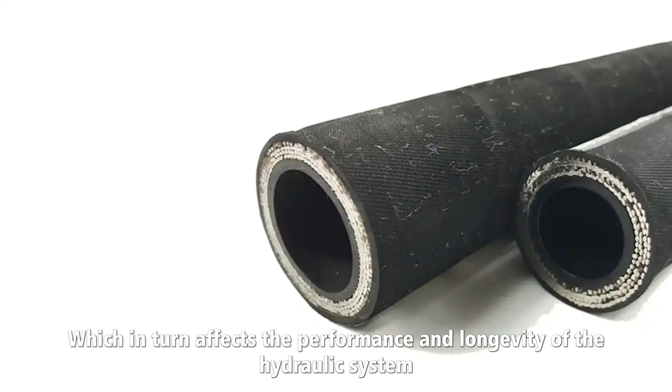The right blade choice directly impacts the quality of the cut, which in turn affects the performance and longevity of the hydraulic system. By selecting the appropriate blade for each type of hose, operators can significantly improve their cutting process, reducing downtime and enhancing the overall safety of the work environment. This post will guide you through the key factors to consider when choosing the right blade, ensuring optimal performance for your hydraulic hose cutting needs.

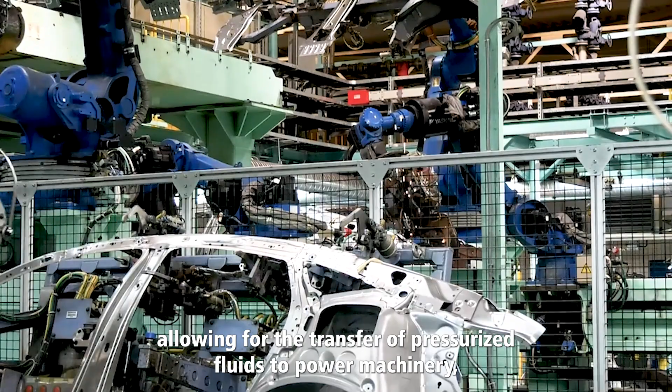Understanding hydraulic hoses. Types of hydraulic hoses. Hydraulic hoses are essential components in hydraulic systems, allowing for the transfer of pressurized fluids to power machinery, industrial equipment, and vehicles. These hoses are constructed from different materials, each tailored to specific applications and environmental conditions.

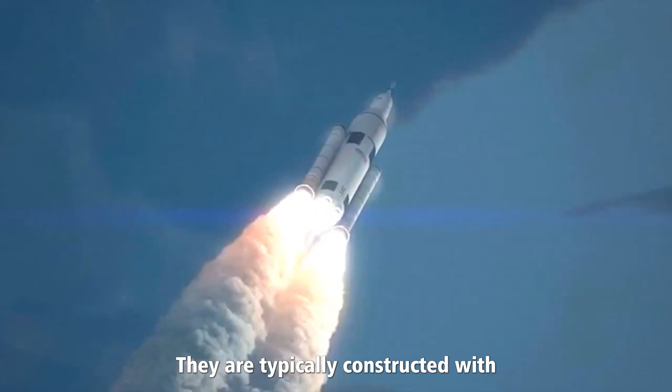Rubber hydraulic hoses. Rubber hoses are among the most common and versatile types used in hydraulic systems. They are typically constructed with an inner rubber core, reinforcement layers, usually made of braided steel wire, and an outer rubber cover. Rubber hoses offer flexibility, high pressure resistance, and good performance in various temperature ranges. They are often used in applications requiring high levels of vibration absorption and movement.

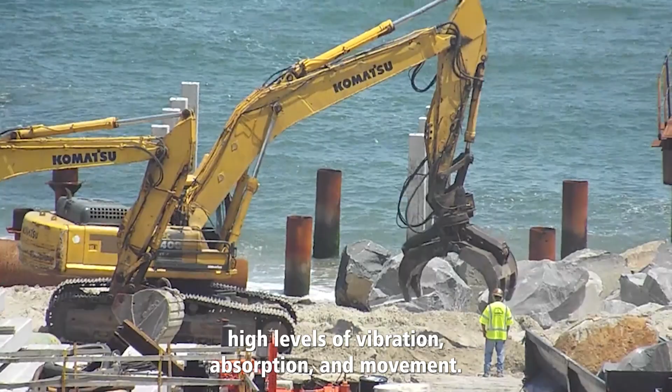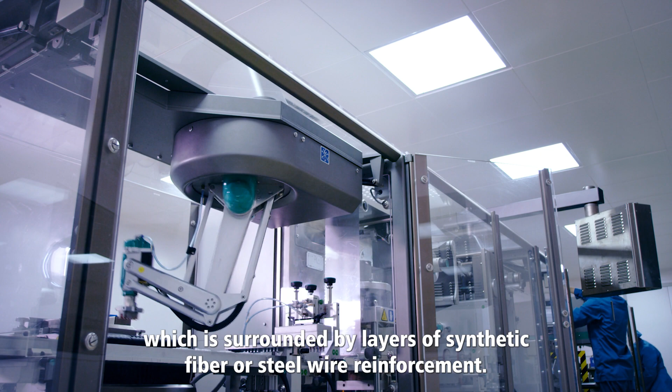Thermoplastic hydraulic hoses. Thermoplastic hoses consist of a polymer-based core, which is surrounded by layers of synthetic fiber or steel wire reinforcement. Thermoplastic hoses are lighter and more resistant to abrasion compared to rubber hoses. They also offer excellent chemical resistance, making them ideal for applications involving corrosive substances or in environments where weight is a concern, such as mobile equipment.

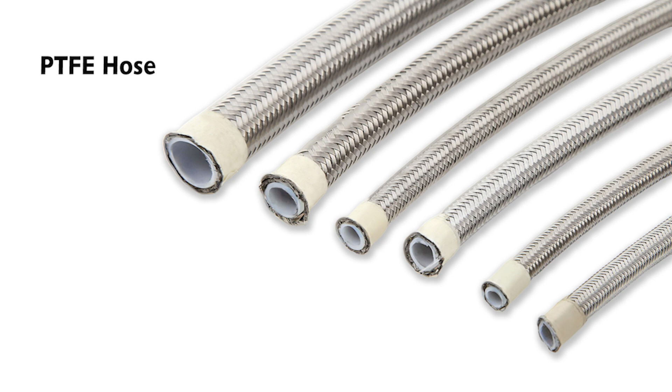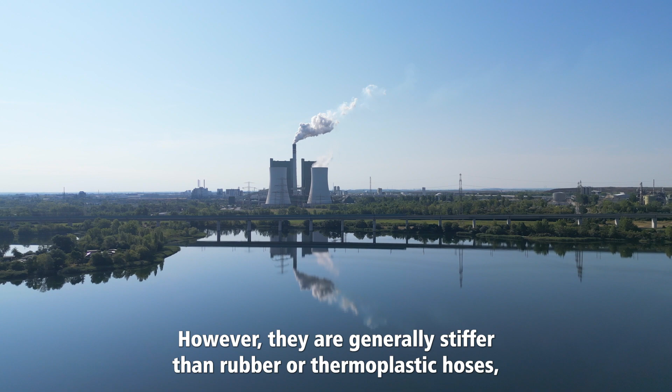Teflon (PTFE) hydraulic hoses. Teflon hoses, made from polytetrafluoroethylene (PTFE), are highly resistant to heat, chemicals, and wear. PTFE hoses are commonly used in high-temperature applications or where extreme chemical exposure is expected. Their smooth interior reduces friction and helps maintain fluid flow efficiency. However, they are generally stiffer than rubber or thermoplastic hoses, which can make cutting and handling more challenging.

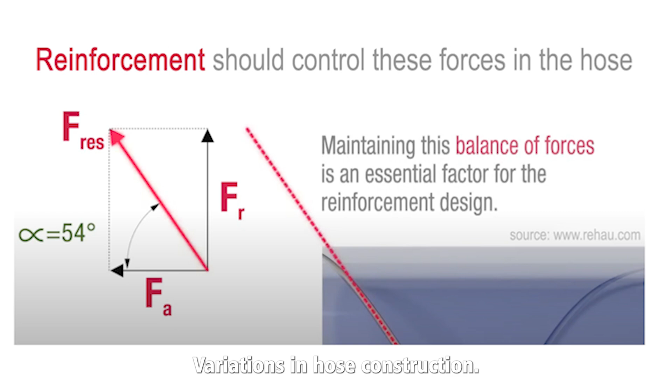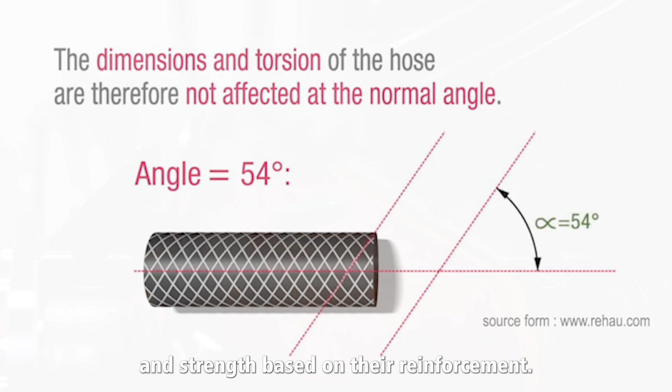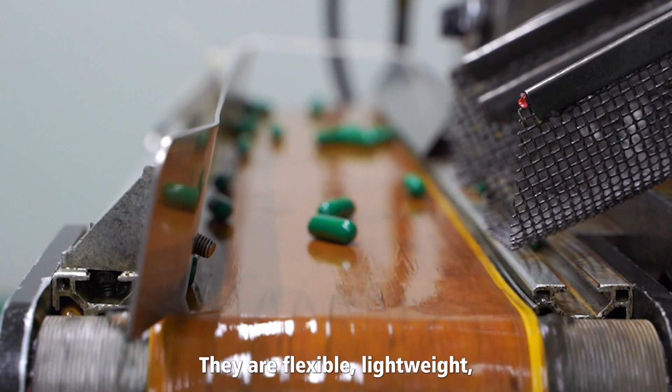Hydraulic hose reinforcement types. Variations in hose construction. Hydraulic hoses are built to withstand the pressures and conditions of their specific applications. The construction of these hoses varies in complexity and strength based on their reinforcement. Single-wire braided hoses. These hoses feature a single layer of braided steel wire reinforcement between the inner tube and outer cover. They are flexible, lightweight, and used in lower pressure applications.

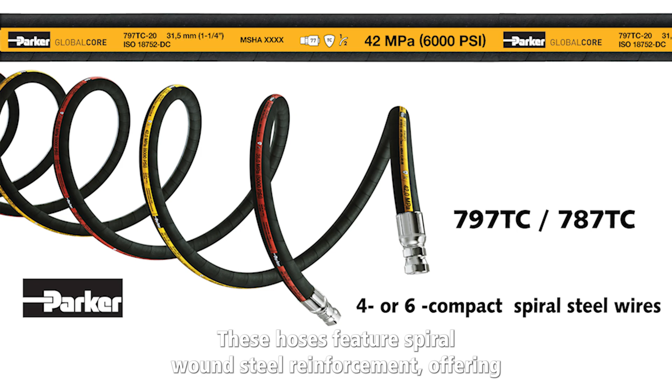Multi-wire braided hoses. Constructed with multiple layers of steel wire reinforcement, these hoses provide increased strength and durability. They are suitable for high-pressure applications and are common in mobile and industrial machinery. Spiral-wound hoses. These hoses feature spiral-wound steel reinforcement, offering superior strength and resistance to high pressure. Spiral-wound hoses are less flexible than braided hoses but are capable of withstanding the highest pressures and are commonly used in heavy-duty industrial settings.

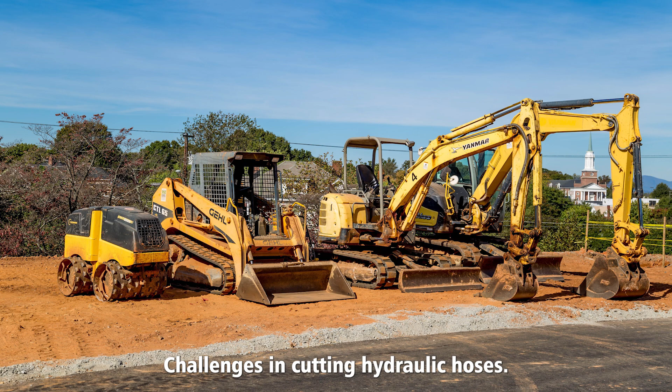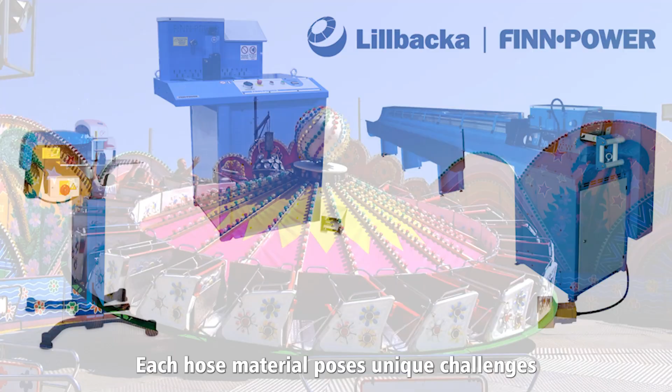Challenges in cutting hydraulic hoses. Cutting hydraulic hoses is not a straightforward task due to the complexity of the hose materials and the variety of their reinforcement structures. Each hose material poses unique challenges that require specific tools and techniques for efficient and safe cutting.

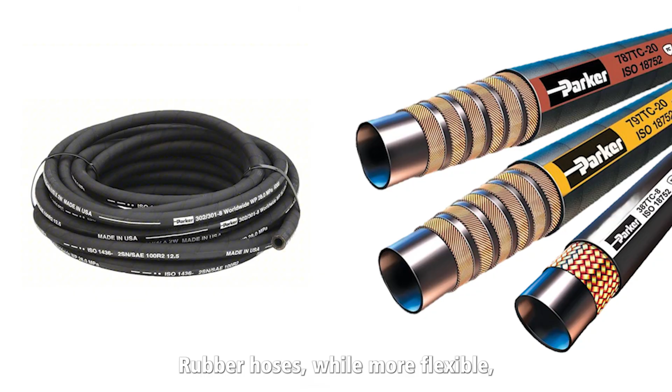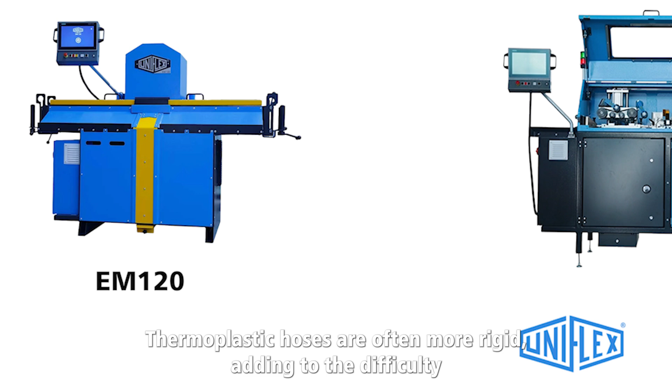Impact of hose material and thickness on cutting difficulty. The thickness and toughness of hydraulic hoses, particularly those reinforced with multiple layers of steel wire or spiral-wound reinforcement, make cutting them difficult. Rubber hoses, while more flexible, can still present challenges because of their thickness and the potential for deformation during cutting. Thermoplastic and PTFE hoses are often more rigid, adding to the difficulty of making clean cuts without specialized blades.

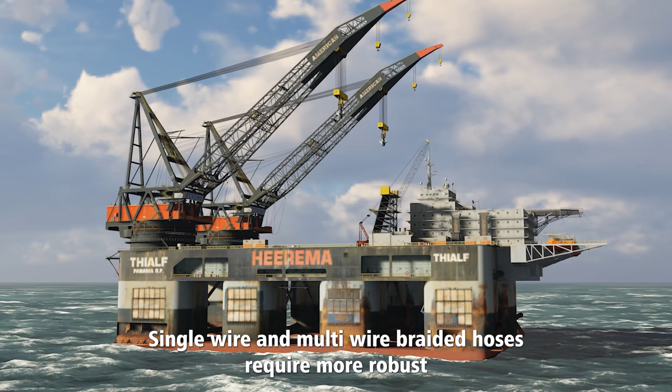The presence of metal reinforcement layers complicates cutting further. Single-wire and multi-wire braided hoses require more robust cutting tools to slice through the steel without damaging the hose's inner tube. Spiral-wound hoses, with their increased strength, demand even stronger blades that can penetrate the multiple layers of reinforcement without fraying the edges or compromising the structural integrity of the hose.

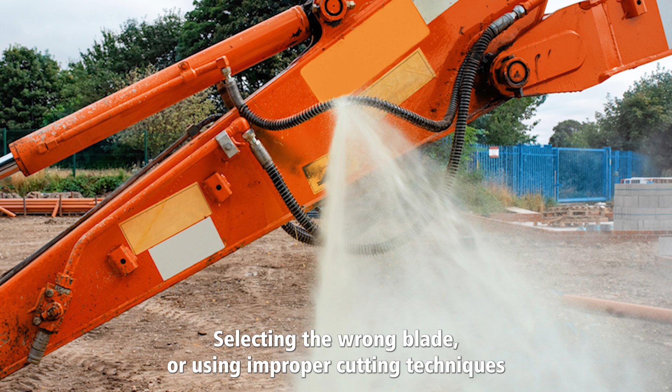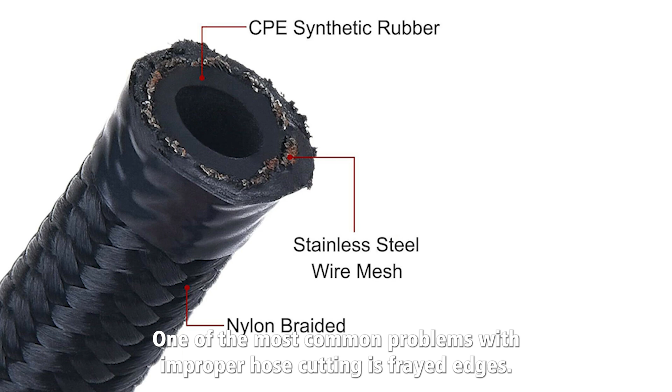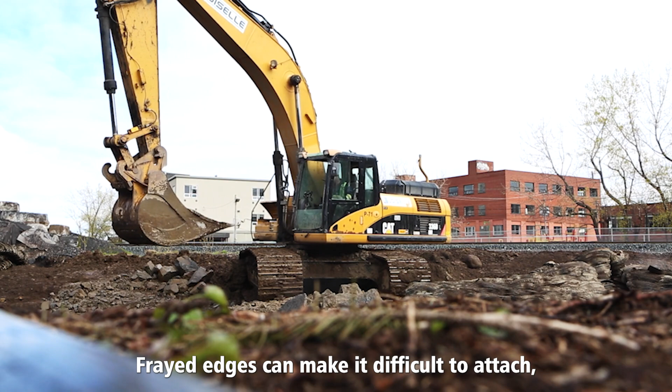Common problems with improper cutting. Selecting the wrong blade or using improper cutting techniques can lead to a variety of issues that negatively impact the performance and safety of hydraulic systems. Frayed edges. One of the most common problems with improper hose cutting is frayed edges. Fraying occurs when the blade is not sharp enough or not suited to the hose material, causing uneven cuts. Frayed edges can make it difficult to attach fittings securely and increase the risk of leaks.

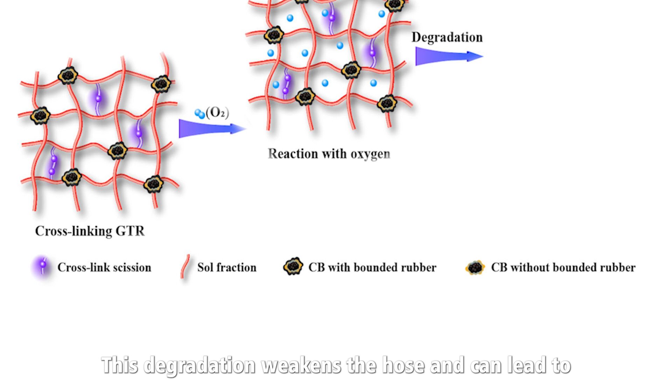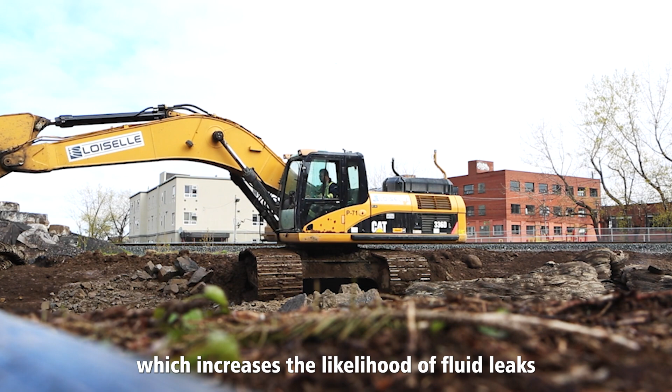Hose degradation. Cutting with dull or inappropriate blades can damage the internal structure of the hose. This degradation weakens the hose and can lead to premature failure, especially in high-pressure applications. Leaks. Poor cuts can also lead to improperly seated fittings, which increases the likelihood of fluid leaks. In hydraulic systems, leaks can cause inefficiencies, downtime, and potential hazards for workers.

Types of blades for hydraulic hose cutting. Cutting hydraulic hoses requires precision, and the choice of blade plays a crucial role in ensuring clean, accurate cuts without damaging the hose's internal structure. There are several types of blades available for hydraulic hose cutting, each designed to tackle specific materials and conditions. Hydraulic hose cutting blade. Cold cutting blades.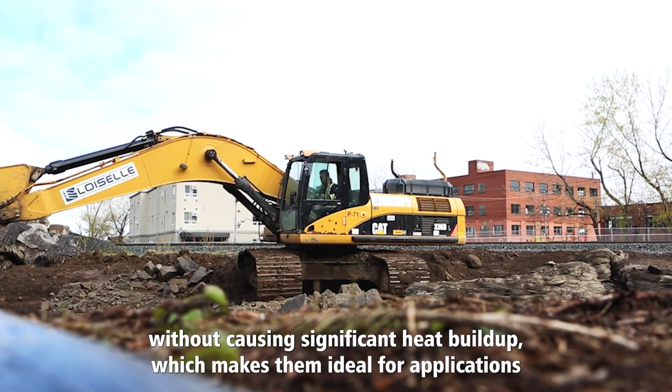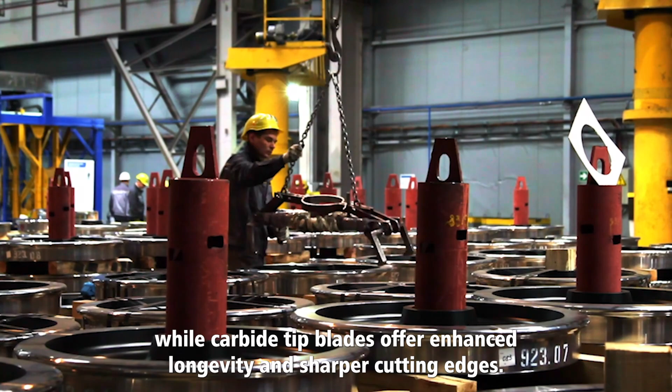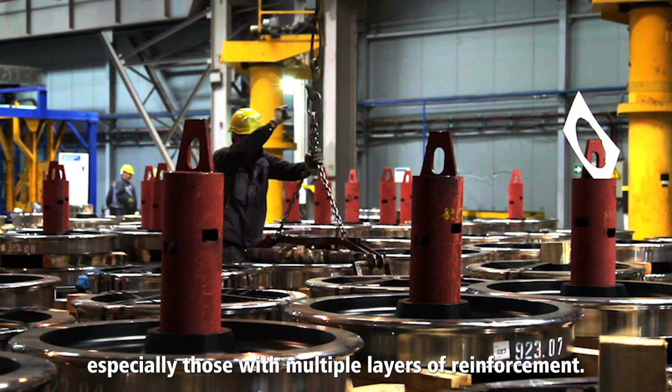Characteristics of cold cutting blades. Cold cutting blades are constructed from high-strength materials like steel or carbide tips. Unlike blades that generate heat during cutting, cold cutting blades work without causing significant heat buildup, which makes them ideal for applications where thermal damage could degrade the hose material. Steel blades are durable and effective for slicing through a range of materials, while carbide tip blades offer enhanced longevity and sharper cutting edges. Best uses for cold cutting blades. Cold cutting blades excel at cutting tough or thick hydraulic hoses, especially those with multiple layers of reinforcement.

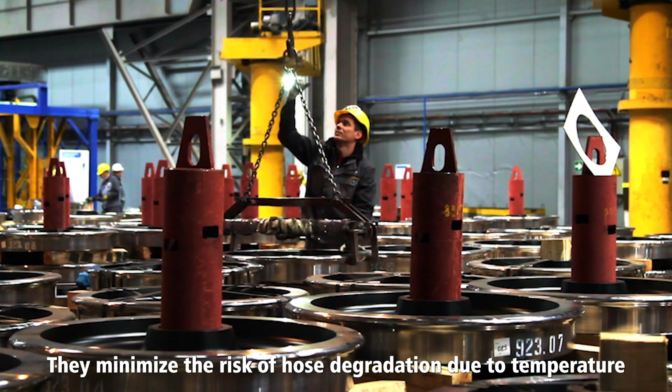They are often used in cutting rubber and thermoplastic hoses, as well as hoses with steel wire or spiral wound reinforcements. Because these blades don't produce excess heat, they minimize the risk of hose degradation due to temperature changes during the cutting process. Pros and cons.

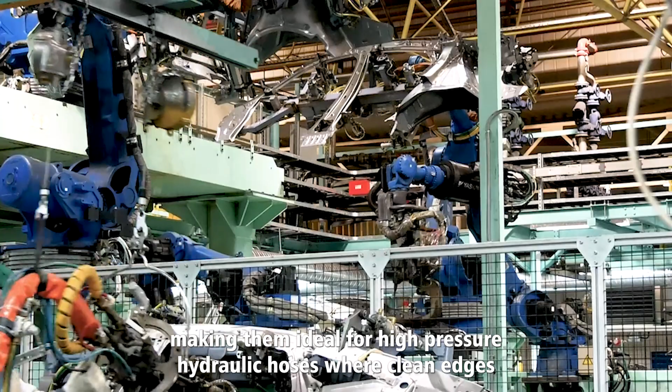Precision. Cold cutting blades are known for their precise cuts, making them ideal for high-pressure hydraulic hoses where clean edges are essential to ensuring secure fittings and preventing leaks. Speed. While cold cutting blades provide precision, they tend to cut more slowly than other blade types, particularly when dealing with heavily reinforced hoses. Cost.

Cold cutting blades, especially carbide-tipped ones, can be more expensive than other blades. However, their durability and the reduction in damage to the hose often justify the initial investment. Shear blades. Description of shear blades.

Shear blades operate similarly to scissors, with two blades working in tandem to slice through the hose. These blades apply shearing force to cut the hose material, which is particularly effective for softer, more flexible hoses. The scissor-like action ensures that the hose is cut cleanly, with minimal deformation or damage to the internal structure.

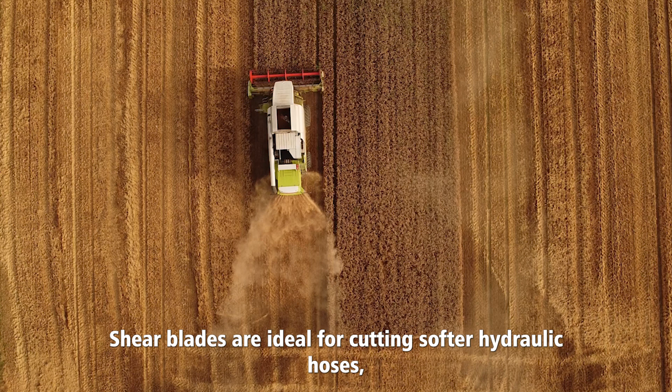Applications in cutting softer, flexible hoses. Shear blades are ideal for cutting softer hydraulic hoses, such as those made of rubber or thermoplastic materials. These hoses do not have the same level of reinforcement as their steel-wired counterparts, allowing the shear blades to make clean cuts without exerting excessive force.

Advantages and disadvantages. Clean cuts. Shear blades are excellent for producing smooth, clean cuts, particularly in hoses that do not require a great deal of force to slice through. This reduces the risk of fraying and ensures that the hose can be securely fitted afterward.

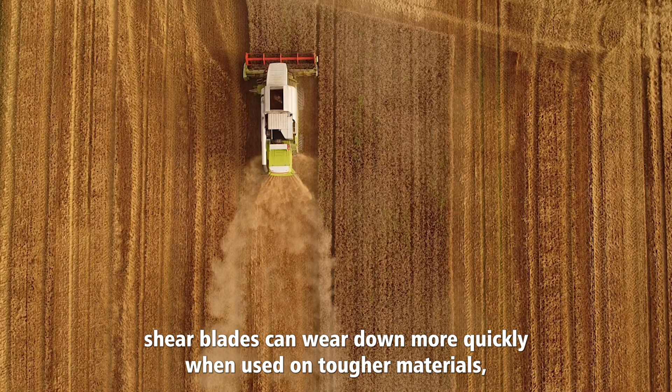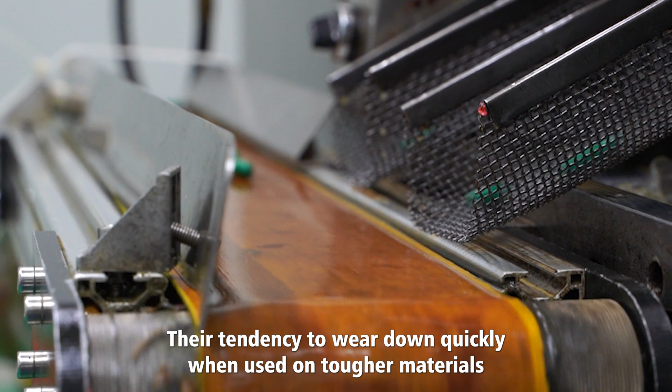Blade wear. Shear blades can wear down more quickly when used on tougher materials, especially hoses with metal reinforcements. This can lead to uneven cuts if the blades are not maintained properly or replaced regularly. While shear blades are effective for softer hoses, their tendency to wear down quickly when used on tougher materials makes them less versatile than other blade types.

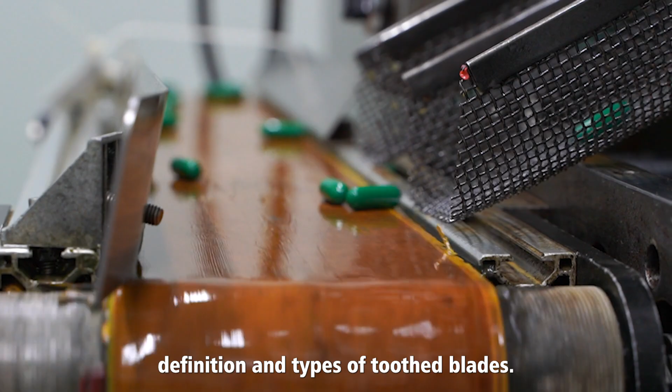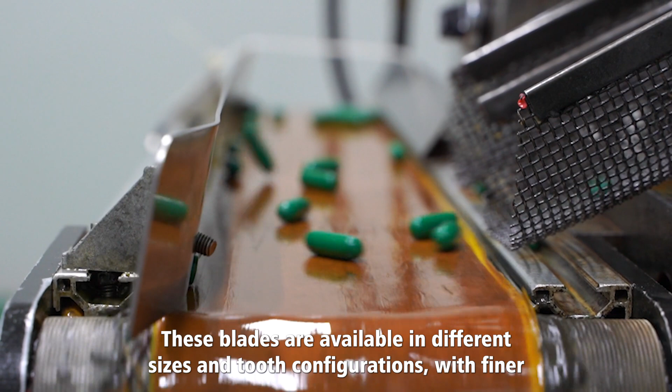Toothed blades. Definition and types of toothed blades. Toothed blades, such as circular saw blades, are characterized by sharp, jagged teeth that are designed to cut through hard materials quickly. These blades are available in different sizes and tooth configurations, with finer teeth for delicate materials and coarser teeth for tougher, reinforced hoses.

Appropriate applications for toothed blades. Toothed blades are best suited for cutting hard, reinforced hydraulic hoses, such as those with multiple layers of steel wire or spiral wound reinforcement. The rapid cutting action of the teeth allows these blades to slice through the hose material quickly, making them ideal for high-volume cutting environments where speed is a priority.

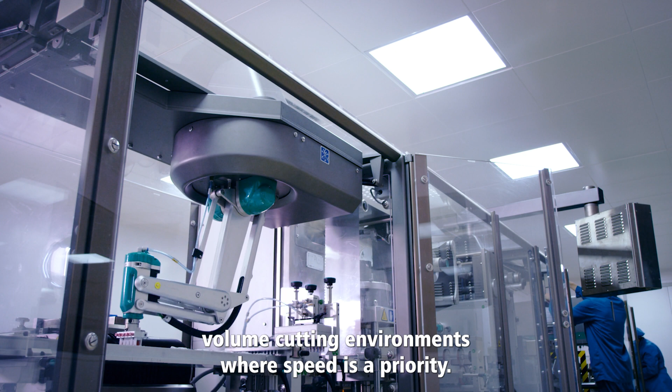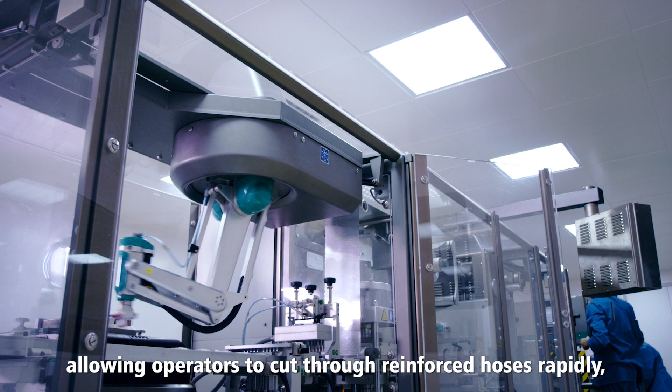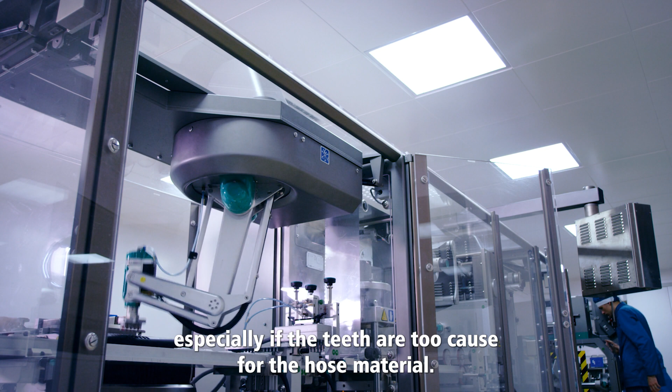Pros and cons. Quick cuts. Toothed blades excel in speed, allowing operators to cut through reinforced hoses rapidly, which is beneficial in large-scale operations. Potential for fraying. While toothed blades are efficient, they can sometimes cause frayed edges, especially if the teeth are too coarse for the hose material. Frayed edges may affect the ability to secure fittings properly and can increase the risk of leaks.

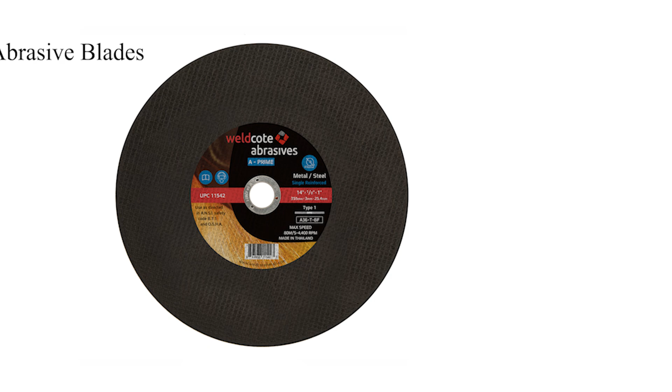Overall, toothed blades offer fast cutting speeds but may require additional finishing to smooth out frayed edges, especially when used on softer hose materials. Abrasive blades. Introduction to abrasive blades. Abrasive blades are designed to cut through materials using a grinding action rather than slicing.

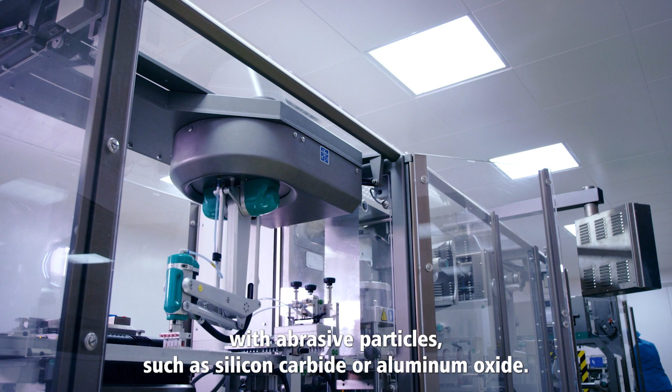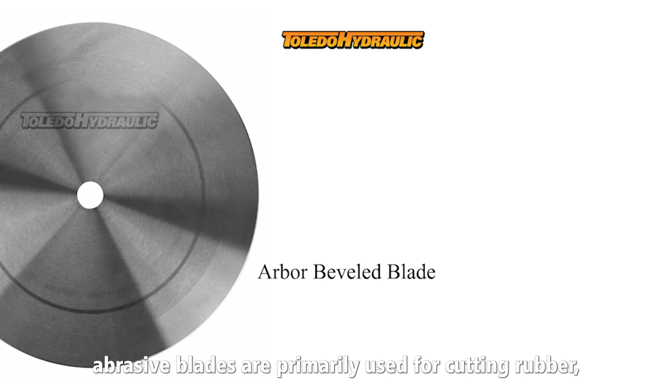These blades are typically composed of composite materials embedded with abrasive particles, such as silicon carbide or aluminum oxide. When cutting, abrasive blades generate friction, which grinds away the material, producing a smooth edge. Usage in cutting rubber or softer materials. Abrasive blades are primarily used for cutting rubber hydraulic hoses or other softer materials.

Their ability to grind away material makes them suitable for applications where a smooth edge is critical, such as when the hose is fitted with high-pressure connectors. Abrasive blades can also handle materials with embedded fibers or light reinforcement. Advantages of smooth edges versus drawbacks of dust production.

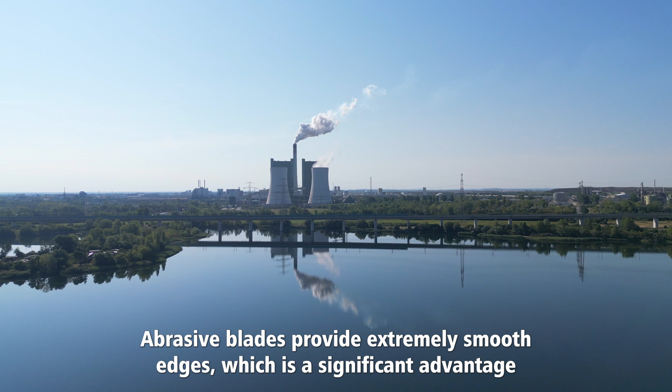Smooth edges. Abrasive blades provide extremely smooth edges, which is a significant advantage when the hose needs to maintain a high level of integrity at the cut ends. This ensures a proper seal when fittings are installed.

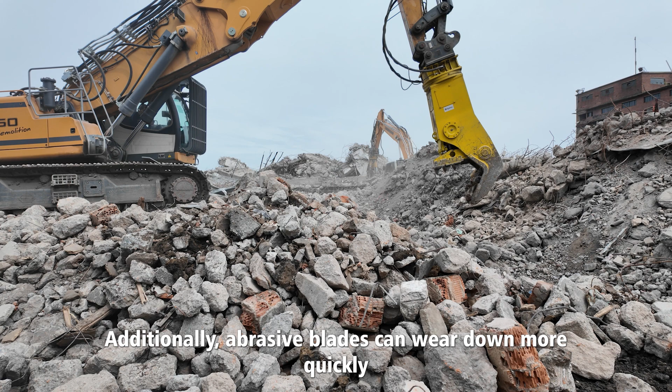Dust production. One of the drawbacks of using abrasive blades is the production of fine dust particles during the cutting process. This dust can accumulate and pose safety hazards if inhaled or if it contaminates the work area. Additionally, abrasive blades can wear down more quickly than other blade types due to their grinding action.

Factors to consider when selecting the right blade. Selecting the correct blade for hydraulic hose cutting involves understanding the hose's material, diameter, and the specific needs of the application. Each factor plays a critical role in determining which blade will yield the best performance, efficiency, and safety. Hose material and construction. Material composition and blade choice.

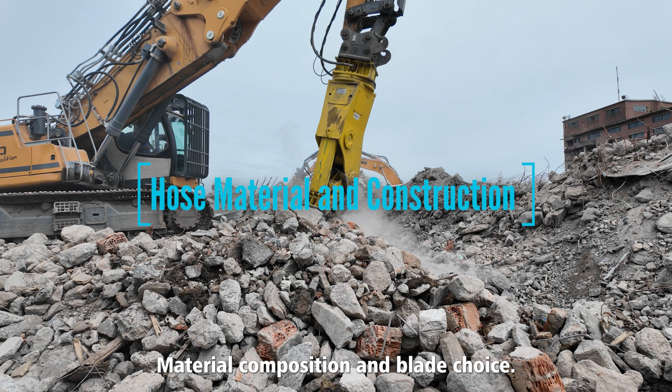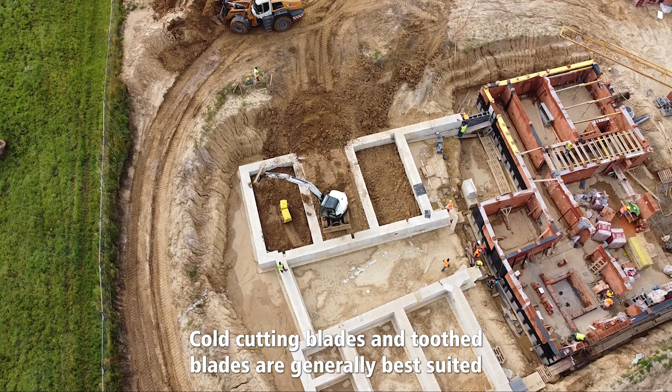Rubber hoses. Rubber hoses are flexible but tough, often requiring sharp blades to ensure a clean cut without fraying or deformation. Cold cutting blades and toothed blades are generally best suited for rubber hoses, depending on the thickness and reinforcement levels.

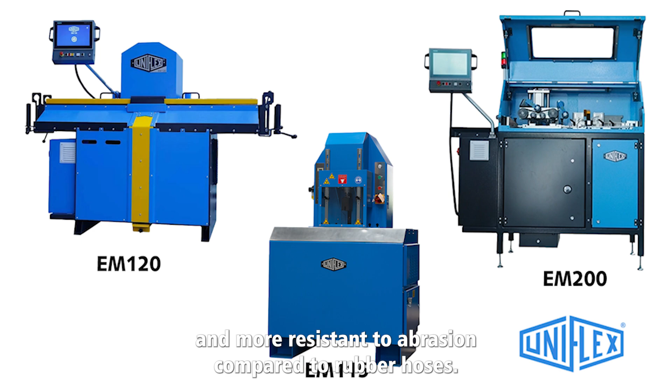Thermoplastic hoses. Thermoplastic hoses are lighter and more resistant to abrasion compared to rubber hoses. They tend to require shear blades or cold cutting blades that can cleanly slice through the polymer material without causing damage to the hose's internal structure.

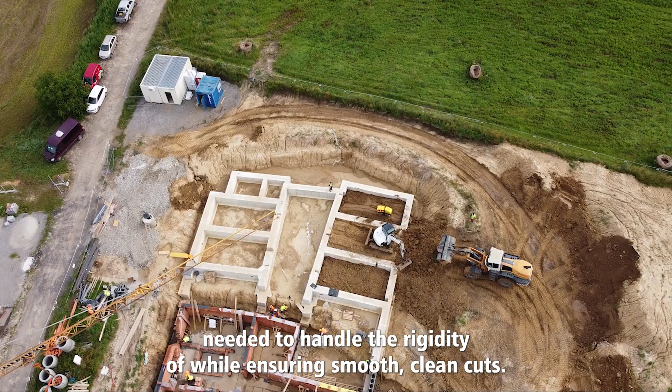Teflon (PTFE) hoses. PTFE hoses are highly heat and chemical resistant but are more rigid than rubber or thermoplastic hoses. Abrasive blades or carbide-tipped cold cutting blades are often needed to handle the rigidity of PTFE while ensuring smooth, clean cuts. Hose layering and blade requirements.

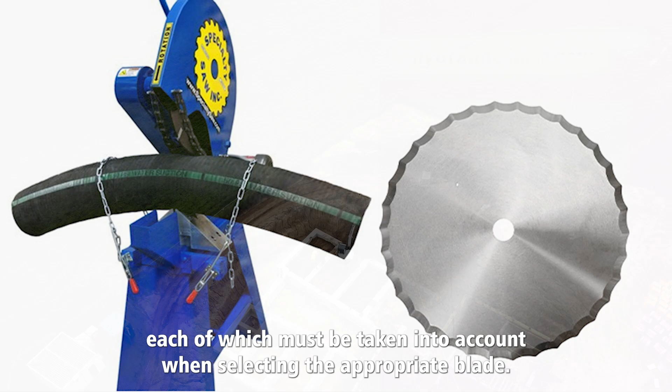The construction of hydraulic hoses involves multiple layers, each of which must be taken into account when selecting the appropriate blade. Hydraulic hoses typically consist of the inner tube, the core layer that carries the hydraulic fluid.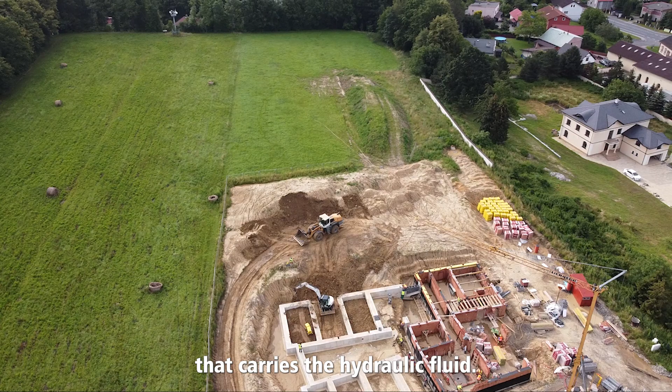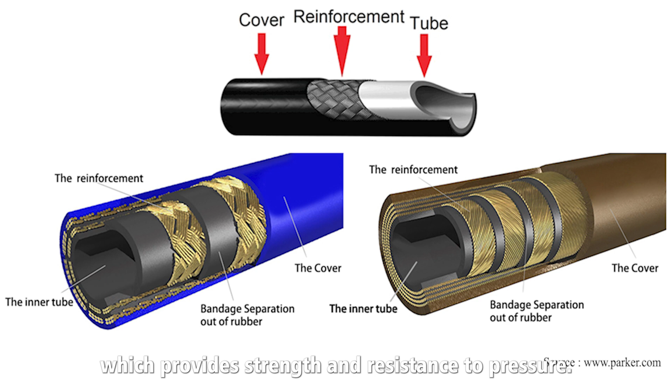Reinforcement layer. This could be a single or multi-layer braided steel wire or spiral wound steel, which provides strength and resistance to pressure. Outer cover, the protective layer that shields the hose from environmental damage, such as abrasion or weathering.

For single-wire braided hoses, cold cutting blades or toothed blades are usually ideal due to their ability to cut through the steel reinforcement while maintaining the integrity of the inner and outer layers. For multi-wire or spiral-wound hoses, toothed blades are often the best choice because they can quickly cut through heavy steel reinforcements without damaging the inner tube. However, for added precision, cold cutting blades may be preferable.

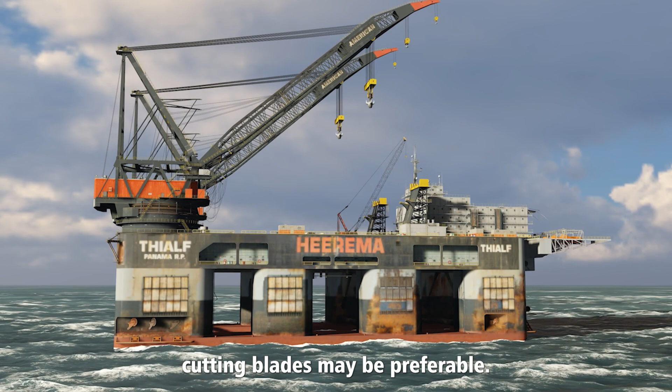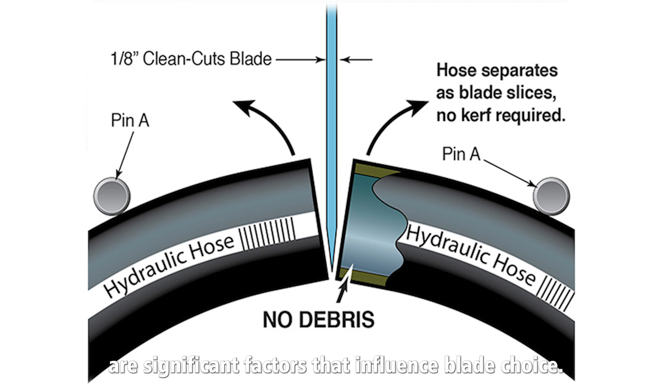Hose diameter and thickness. Blade selection based on hose size. The diameter and thickness of the hydraulic hose are significant factors that influence blade choice. Larger diameter hoses with multiple reinforcement layers require more robust blades, while smaller hoses can often be cut with lighter duty blades. Small diameter hoses. For hoses with smaller diameters, such as those used in low-pressure or compact hydraulic systems, shear blades or cold cutting blades may suffice. These hoses typically have less reinforcement and require precision over power when cutting.

Large diameter hoses. Larger hoses with thick walls and heavy reinforcement, such as spiral-wound hoses, need powerful toothed blades or abrasive blades to slice through the layers effectively. The increased diameter and thickness demand blades that can handle the force required to cut through multiple layers without compromising the hose structure. By matching the blade to the hose's size and thickness, operators can ensure efficient cutting and minimize the risk of damaging the hose.

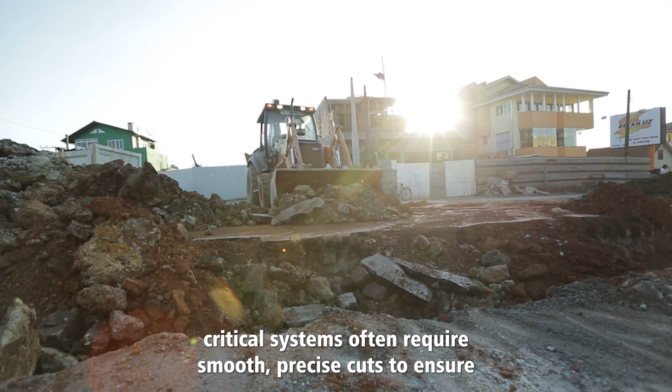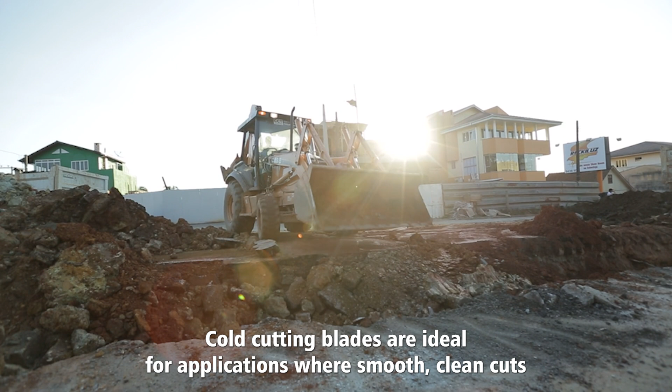Required cut precision. Precision needs and blade selection. The level of precision required in cutting hydraulic hoses varies depending on the application. High-pressure hoses and hoses used in critical systems often require smooth, precise cuts to ensure that fittings can be securely attached and that the hose remains leak-free. For high-precision cuts, cold cutting blades are ideal for applications where smooth, clean cuts are necessary, such as in high-pressure hydraulic systems. These blades ensure that the hose ends are free of burrs or frayed edges, which is crucial for forming a proper seal with fittings.

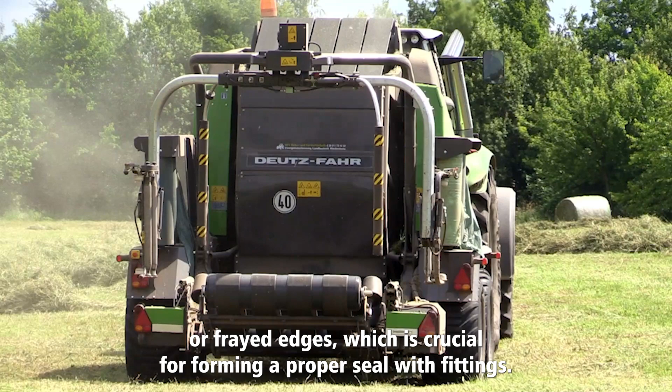Trade-offs between precision and speed. While cold cutting blades offer high precision, they are slower than toothed or abrasive blades. In high-volume environments, operators may need to balance the need for precision with the need for speed. Toothed blades, for example, can offer faster cuts, but the edges may require additional finishing to ensure a secure connection. Understanding the trade-offs between precision and cutting speed allows operators to choose the blade that best fits their application while minimizing rework or finishing efforts.

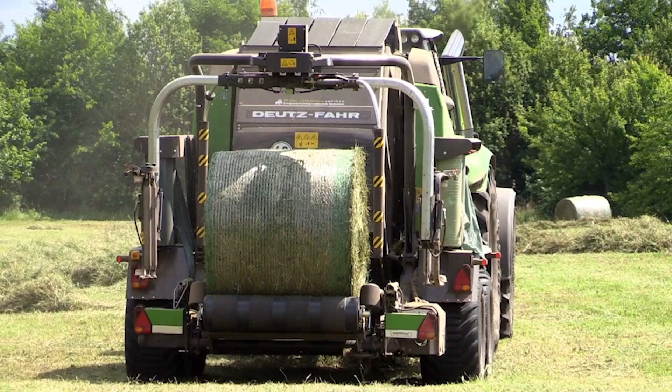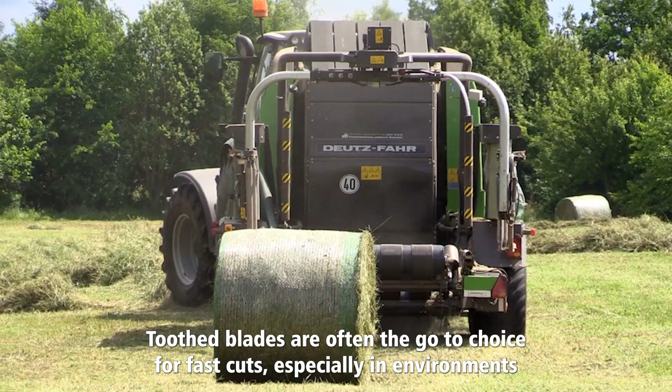Cutting speed and efficiency. Balancing speed and accuracy. In high-volume cutting environments, speed and efficiency are critical factors. Operators need blades that can handle the workload while maintaining acceptable levels of precision. The right blade can reduce downtime, minimize wear and tear on cutting tools, and increase overall productivity. Fast cutting blades. Toothed blades are often the go-to choice for fast cuts, especially in environments where hoses need to be cut quickly and in large quantities. These blades excel in speed but may require additional finishing steps to ensure the hose ends are suitable for use.

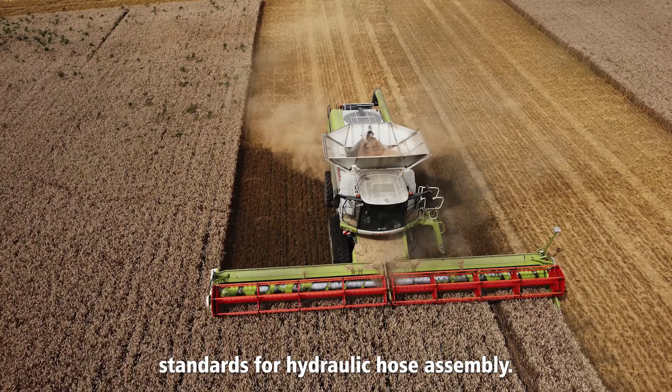Maximizing efficiency. Cold cutting blades, while slower, offer greater durability and produce cleaner cuts, which can reduce the need for rework. By selecting blades that balance speed with accuracy, operators can maximize efficiency without sacrificing quality. Selecting a blade that balances speed and precision helps maintain productivity while ensuring that each cut meets the necessary standards for hydraulic hose assembly. Safety considerations.

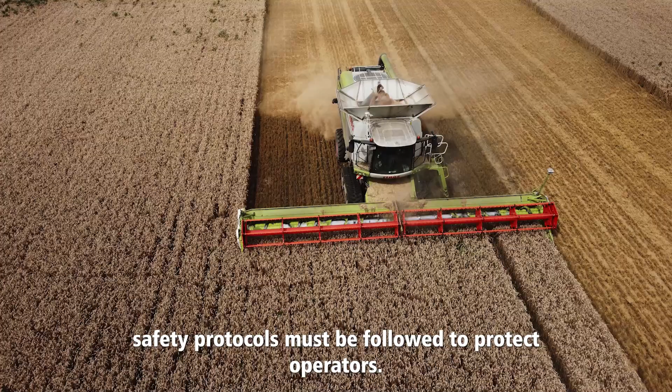Safety precautions by blade type. Safety should always be a top priority when selecting a blade for hydraulic hose cutting. Different blades present unique hazards, and proper safety protocols must be followed to protect operators. Cold cutting blades. These blades generate little heat, reducing the risk of burns or overheating during the cutting process. However, they are sharp and require careful handling to avoid accidents. Shear blades. Shear blades operate similarly to scissors and present minimal risk of debris or sparks. However, they still pose a risk of injury if not handled correctly.

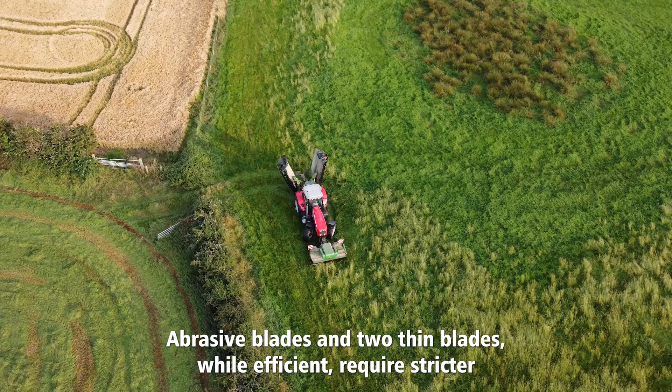Toothed blades, particularly those used in saws, can create debris and sharp fragments during the cutting process. Operators should wear protective eyewear and gloves to prevent injuries. Abrasive blades generate dust and can cause respiratory hazards if proper ventilation and protective masks are not used. Additionally, the friction they produce can create sparks, which can be dangerous in certain environments. Blades with the best safety profiles. Cold cutting blades generally offer the best safety profile due to their precision and minimal heat generation. Abrasive blades and toothed blades, while efficient, require stricter safety protocols to mitigate risks such as dust, debris, and sparks.

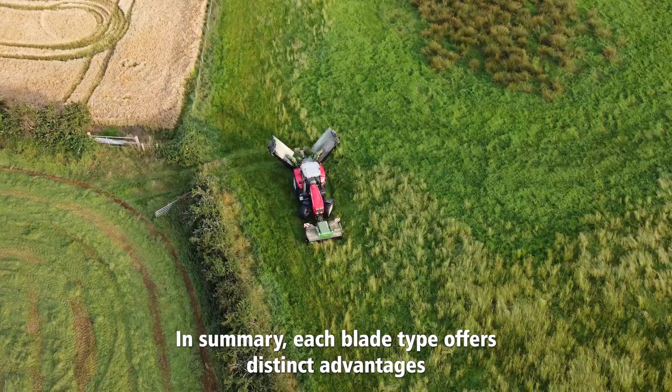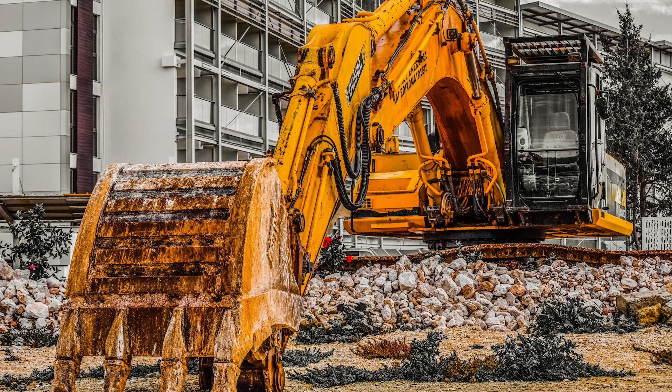Conclusion. In summary, each blade type offers distinct advantages and is suited to specific applications. Cold cutting blades excel in precision, shear blades are ideal for softer hoses, toothed blades handle tougher materials effectively, and abrasive blades provide versatility for a range of hose types. The right blade not only improves cutting accuracy but also contributes to overall safety and operational efficiency.